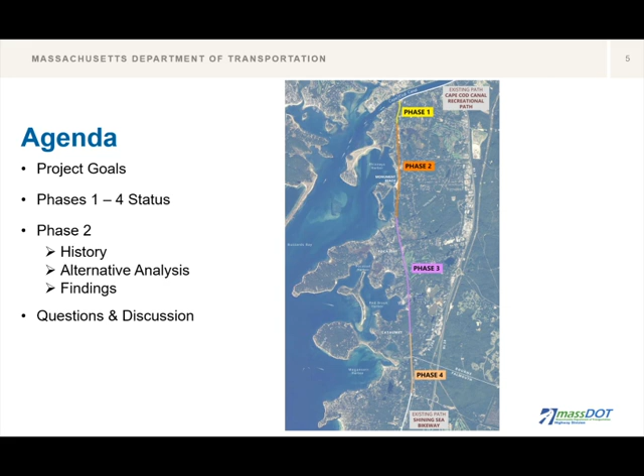First, we're going to talk about our agenda. We're going to discuss the project goals, the status of phases 1 through 4 of the Bourne Rail Trail. Then we'll focus on the phase 2 portion of the project, the history, and the alternatives analysis that we've conducted, and then we'll open it up to questions and answers and discussion to get some feedback on our implementation strategy.

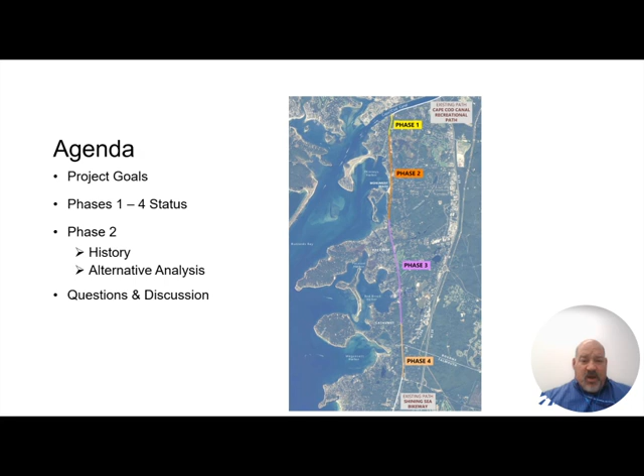Our project goals: a goal of the region, described in Vision 88 by the Cape Cod Commission and in parallel to the statewide bike plan, is to establish and implement a region-wide trail network for all users in a healthy and sustainable manner. We want to connect the canal path to the Shining Sea Bikeway in Falmouth, which were both included in Vision 88 and in the statewide bike plan. As part of that, we're evaluating alternatives that can be implemented.

Let me first state, the town of Bourne has been a great partner on all phases of the Bourne Rail Trail project. The town hired VHB to design phases 1 and 2, and in partnership with the town of Falmouth, phase 4.

As the design is developed, constraints with standards, right-of-way, and permitting have surfaced. While the Highway Division designs and implements many rail trail projects statewide, we follow design standards as they interact or possibly impact stakeholders. There needs to be a compromise at times. I don't want to get into the specifics at this time. I'm going to allow VHB to go through the presentation and provide a summary.

However, DOT recognizes that when constraints become barriers to implementation, we need to find a path forward. We may not build 100% consensus on a project, and I could reference the Cape Cod bridges, which you're all aware of. Everyone knows those bridges need to be replaced, and we're working diligently on the project design and permitting efforts, but there's still a lot of work to be done. It can't simply be 'we need to do this, it needs to get done.' We need to find a compromise on certain items, on the bridge types, on the connection details to the roadways, and the like.

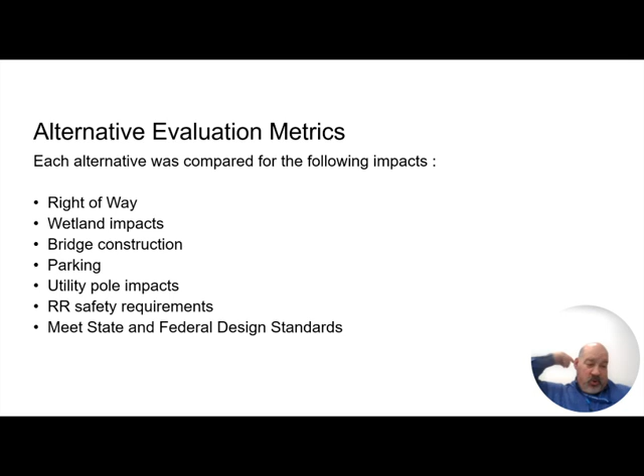One item we haven't really focused on yet tonight is Joint Base Cape Cod, the largest military training location in the Northeast. The Falmouth Secondary rail line runs from the Cape Cod Canal railroad bridge north to North Falmouth. The Otis branch runs east into Joint Base Cape Cod at the Upper Cape Regional Transfer Station. So the Falmouth Secondary and the Otis branch connect Joint Base Cape Cod to the main southeastern Mass rail line.

And they complete an important part of the strategic rail corridor network, called STRACNet, a network of rail lines and connectors linking U.S. military installations and transportation hubs throughout the United States. STRACNet identifies Joint Base Cape Cod as one of 25 Army installations nationwide requiring rail service. It's a vital part of our national defense, making it possible for the U.S. military to move heavy equipment, supplies, and troops across the country in times of national emergency.

Accordingly, in 2018, the Falmouth Secondary and the Otis branch were used to move armored recovery vehicles from Louisiana to Massachusetts. To remain prepared, the military must be able to adapt and quickly respond to threats posed by real-time world events. Looking at the strategic importance of this line, the focus can't be on when did we use it last. It must be on, will it be there when we need it?

To ensure military readiness, a new spur connecting Joint Base Cape Cod to the main line would need to be built before any existing rails could be removed. Because the Falmouth Secondary is a working railroad, abandoning the track would require a petition for approval from the Surface Transportation Board, as well as discussions with the Department of Defense. Any changes to the Otis branch would also have implications for the Upper Cape Transfer Station and existing contracts with operators that are in place.

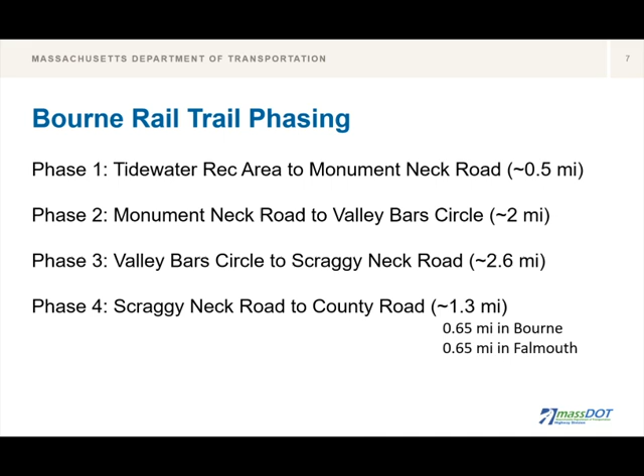The project phasing is as follows. Phase 1 is from the canal at the Tidewater Recreational Area parking lot to Monument Neck Road. Phase 2, which is what we'll be talking about today, is from Monument Neck Road to Valley Bars Circle. Phase 3 is Valley Bars Circle to Scraggy Neck Road, and Phase 4 is Scraggy Neck Road to County Road.

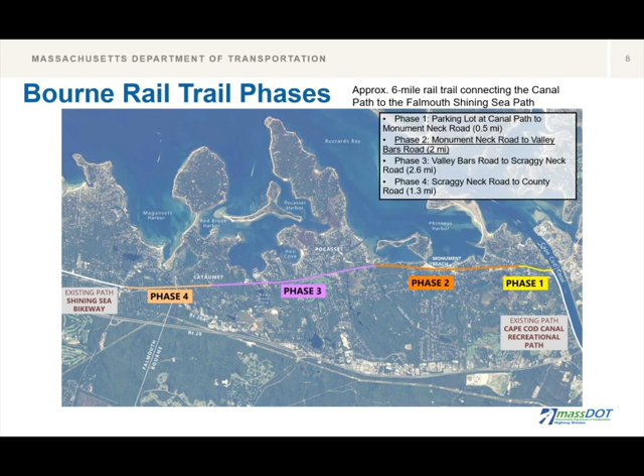This graphic is just a representation of each of the phases. Phase 1 starts at the canal and ends at Monument Neck. Phase 2 starts at Monument Neck and ends at Valley Bars. Phase 3 starts at Valley Bars and ends at Scraggy Neck Road. And Phase 4 ties into the Shining Sea Bikeway at County Road.

Phase 2 is at the alignment selection stage. The design needs to be initiated and the construction advertisement date has not been determined.

Phase 3, a study to determine what the preferred alignment would be, has not been initiated and the construction advertisement date has not been determined.

In Phase 4, a pre-25 concept level design has been designed, but the construction advertisement date has not been determined.

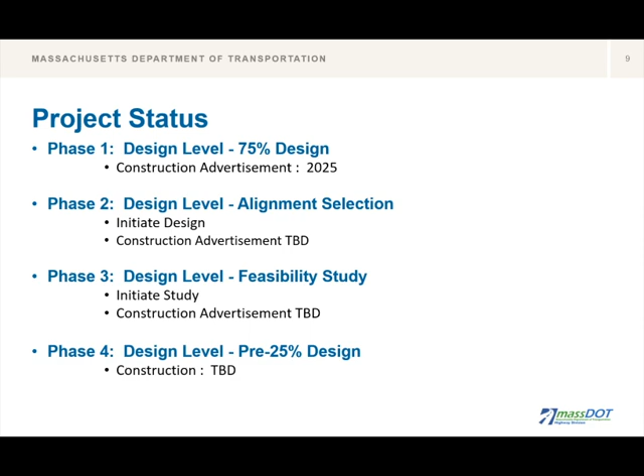The next series of slides are going to go through state and federal design criteria and the project history.

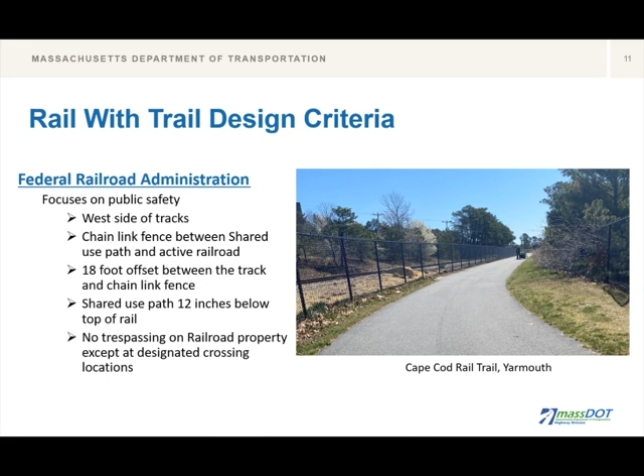The design of rail with trail projects or any shared use path project needs to follow federal criteria. For rails with trails, that criteria falls under the Federal Railroad Administration requirements. Some of the design criteria that we followed for this project are listed on this slide.

For shared use path designs, the design needs to follow FHWA and Mass DOT highway design criteria. Both of those agencies focus on multimodal mobility and healthy transportation designs. They also focus on safety for the path users.

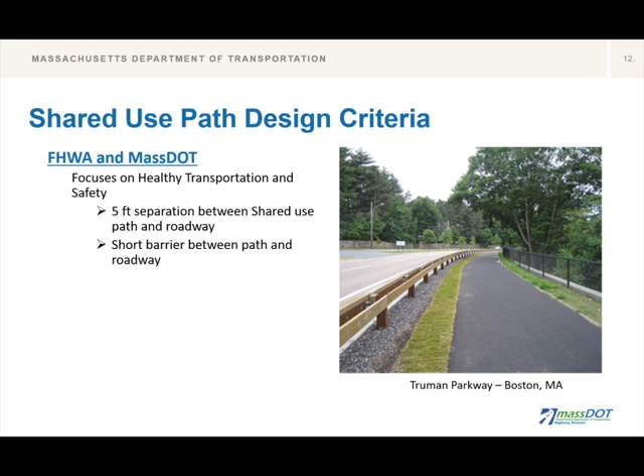To get into a little bit of the Phase 2 history, the town retained VHB to develop concepts for the design of the shared use path for Phase 2. There were two alternatives that were considered for the shared use path within the Phase 2 project limits.

Both alternatives were within the railroad right-of-way on the west side of the tracks. One alternative looked at a 10-foot minimum offset with varying offset at some of the constraints from the center line of track to the shared use path. The second alternative was a standard 18-foot offset from the center line of track to the shared use path.

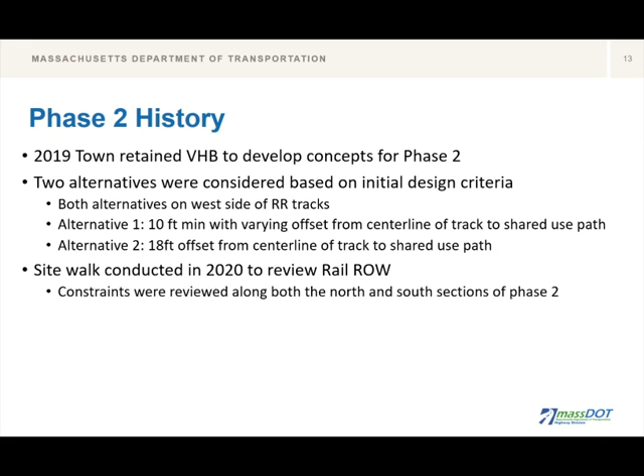To take a look at each of these alternatives, a site walk was conducted in 2020 to review some of the constraints within the railroad right-of-way. The site walk took a look at some of the impacts to private property that were identified as part of the development of the concept plans.

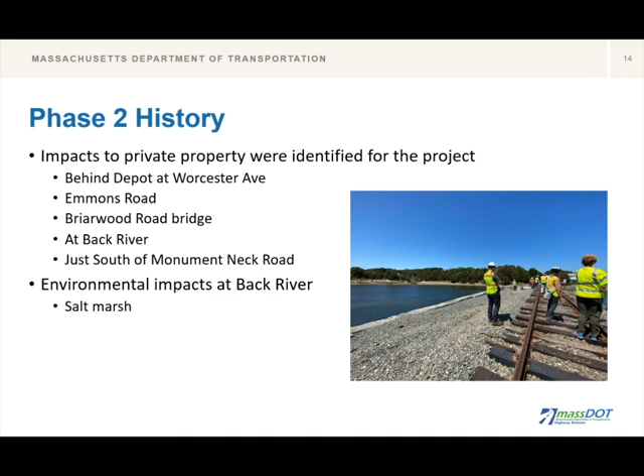Some of the impacts included along the residential properties behind the depot at Worcester Ave, residential properties at Emmons Road, the Briarwood Bridge itself, and at the Back River there would be impacts, and also just south of Monument Neck Road. It was also noted that there are environmental impacts at the Back River if an 18-foot offset was used.

The next series of slides show the concept plans that were developed in 2019 and 2020 as a result of initial conversations with Mass DOT Rail Division and Mass DOT Highway Division. This plan shows that the shared use path has an 18-foot offset from the center line of the railroad track.

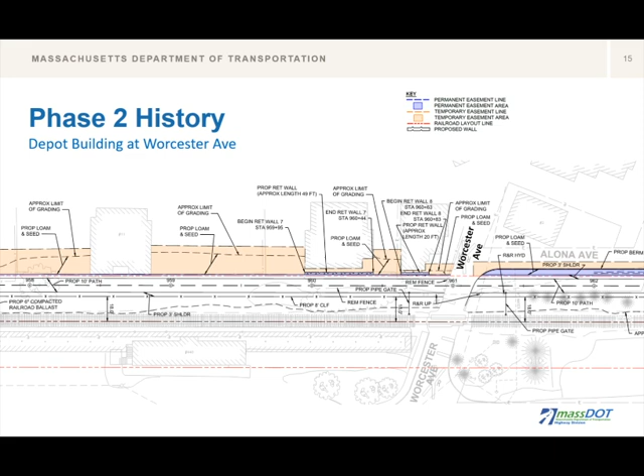At Worcester Ave, there are 3 properties behind the depot that would have impacts associated with where the shared use path is adjacent to the property itself. You can see at this location, this house would be right on the shared use path. These 2 houses adjacent to Worcester Ave would require retaining walls, so the construction of the shared use path wouldn't fall within the houses or fill in the back of the houses.

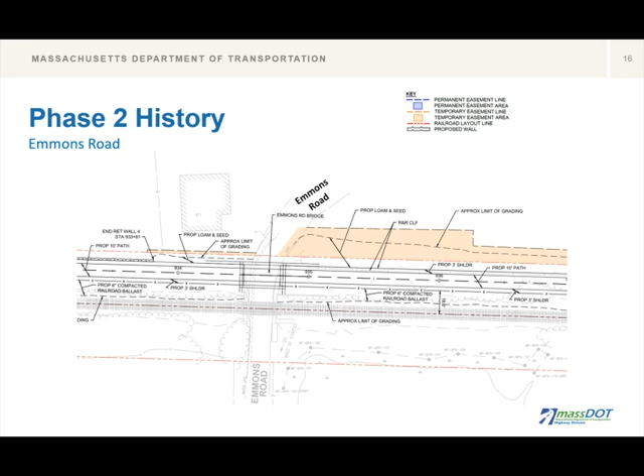At Emmons Road, this property here would be about 23 feet from where the shared use path would be constructed.

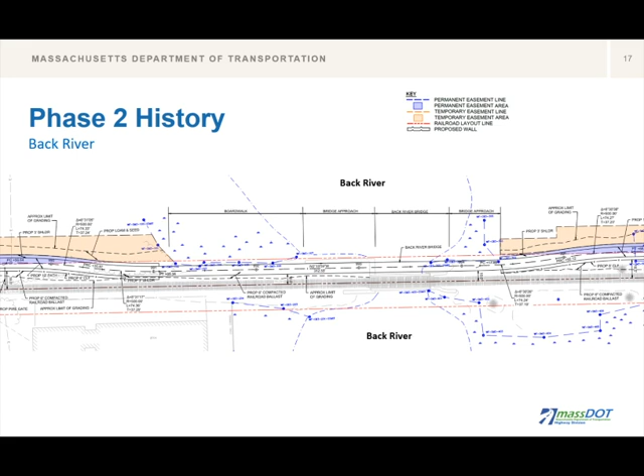At the Back River, to avoid this blue line, which is wetlands, or to minimize the impact to wetlands, some of the things that were discussed in the field was to bring the shared use path onto the existing bridge abutment that's not currently being used by the railroad, and minimize the impacts to the wetlands that are adjacent to the bridge itself. Some of the other impacts could be minimized or avoided by putting sections of the path on a boardwalk structure to span over the wetland areas.

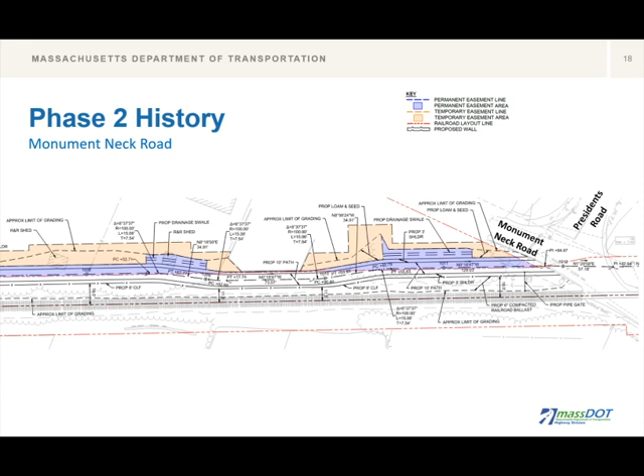This slide shows the path with an 18-foot offset at Monument Neck Road, which is the northern limits of Phase 2. This section of the project had what we think is a raised septic field adjacent to the railroad right of way that we were trying to avoid, which shows the offset between the center line of track and the shared use path go from 18 feet down to an 11.5-foot offset to avoid this septic field and to stay within the existing railroad right of way.

When we took a look at the Phase 2 alternatives, we divided them into a northern section and a southern section to really study what the alternatives could be for each phase of this project. The Phase 2 south section project limits for this alternatives analysis would be from Worcester Ave to Valley Bar Circle, and the northern section would be from Worcester Ave to Monument Neck Road.

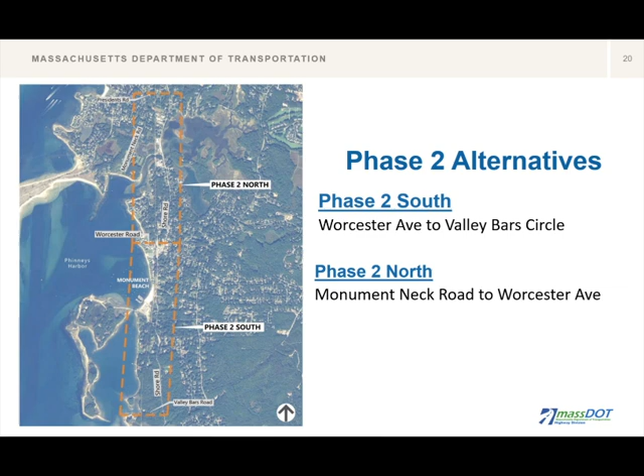For the southern part of Phase 2, from Valley Bars Circle to Worcester Avenue, VHB was asked to evaluate 3 different alternatives. The first is a rail with trail alignment on the west side of the railroad tracks. The second is a shared use path on Shore Road. The third combines the first two, with a rail with trail on the west side of the tracks from Valley Bars to Monument Beach, then crossing to Shore Road with a shared use path from Monument Beach to Worcester Avenue.

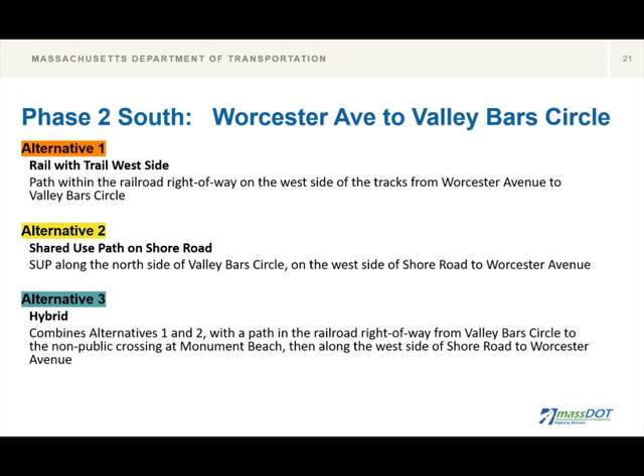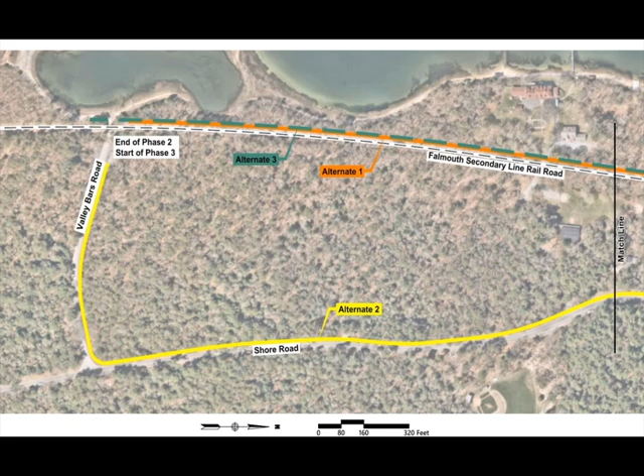The next few slides are zoomed out aerial images showing the alignment for each alternative. As you can see, alternatives 1 and 3 are on the west side of the railroad tracks, and alternative 2 goes east on the north side of Valley Bars Road to Shore Road, where the path continues north on the west side of Shore Road.

This slide continues to show each alternative for the southern part of Phase 2. I'd like to point out that for alternatives 1 and 3, a proposed bridge over Emmons Road would be needed.

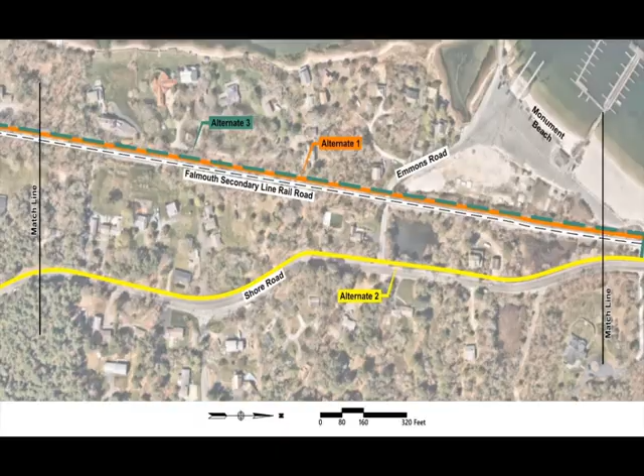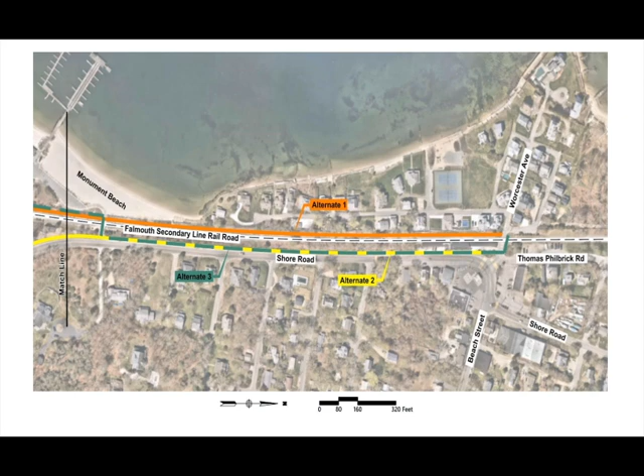This last aerial view shows how alternative 1 continues on the west side of the existing railroad tracks, alternative 2 continues on the west side along Shore Road, and alternative 3 uses the existing crossing for emergency vehicles at Monument Beach to go from a rail with trail to a shared use path. Each of these alternatives ends at Worcester Avenue, where the northern part of Phase 2 was evaluated separately, and we will go over those alternatives later in this presentation.

Now I'd like to discuss some of the existing features found in each alternative on the southern part of the Phase 2 analysis. The image on the left is from our 2020 site visit of the Briarwood Lane Bridge. The path would be proposed to go in the space between the existing pier and the abutment, but this would need to be evaluated further, and any impacts to the existing bridge structure would need to be looked at.

The image on the right shows the existing railroad bridge over Emmons Road. Alternatives 1 and 3 propose a new bridge structure that is an 18-foot offset from this existing bridge. As shown before, during the history of the project, there is a house that would be in close proximity to this proposed structure.

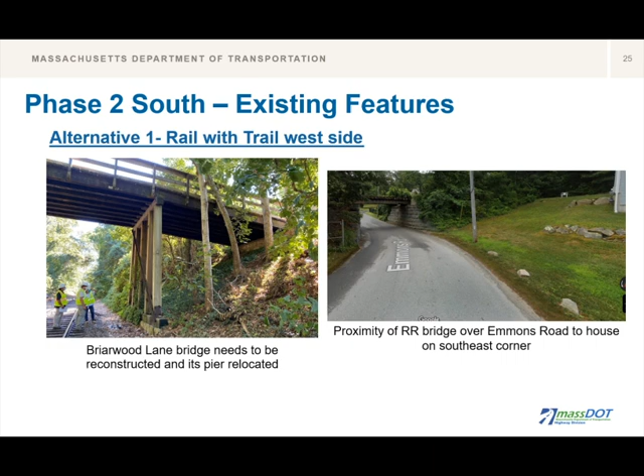Next, these two images are at the depot building on Shore Road, close to the Worcester Avenue intersection. Both taken at the 2020 site visit, with the proposed path on the west side of the railroad tracks, you can see there would be major impacts to the houses in close proximity to the railroad tracks, and the existing screening would have to be cleared away.

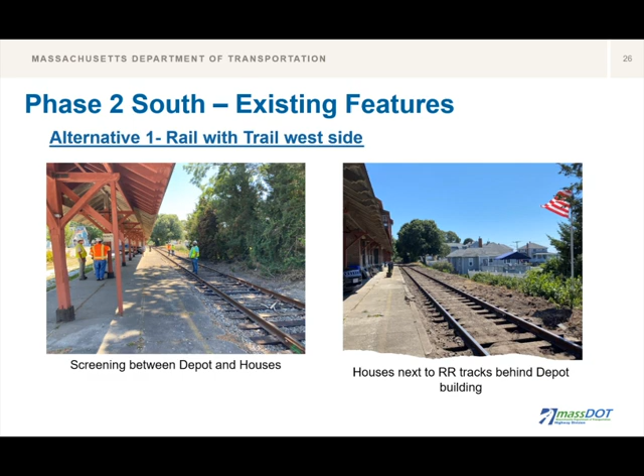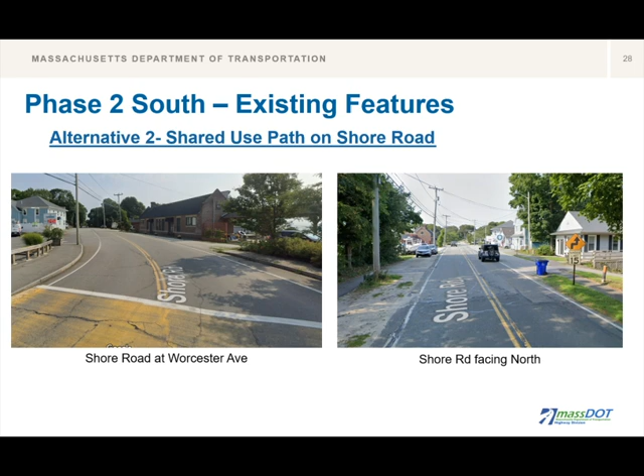The picture on the right is another part of Shore Road, an example of Shore Road having sidewalk on one side of the road, but there are some parts of Shore Road that do not have any sidewalk. Even though there is a sidewalk in this picture, it is not universally accessible. This picture also shows an example of the informal parking found in some areas on Shore Road.

To avoid major impacts at this location, one recommendation is to realign Shore Road here. Shore Road is not in the middle of the existing layout, so there could be space within the public right-of-way to shift the roadway and put in a shared use path.

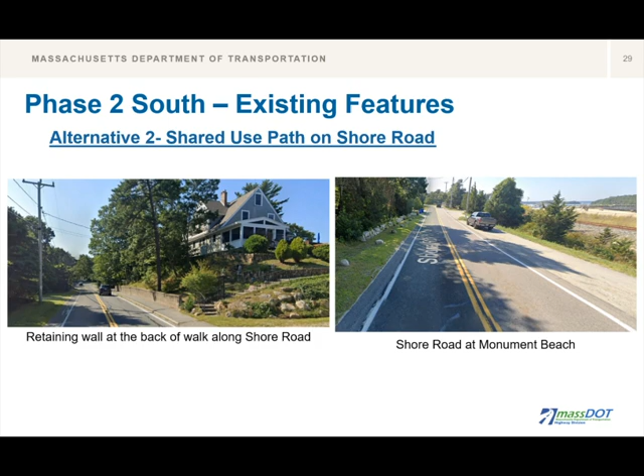The picture on the right is showing Shore Road at Monument Beach. In the image, you can see the railroad tracks and the beach in the back. People park along Shore Road and trespass on the railroad tracks to get over to the beach.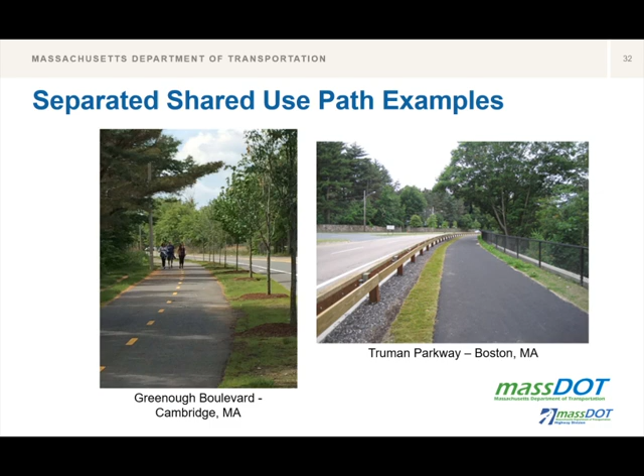For alternative 3, I just want to show the existing emergency vehicle access between Shore Road and Monument Beach. This is what we are proposing to use to transition alternative 3 from a rail with trail to a shared use path.

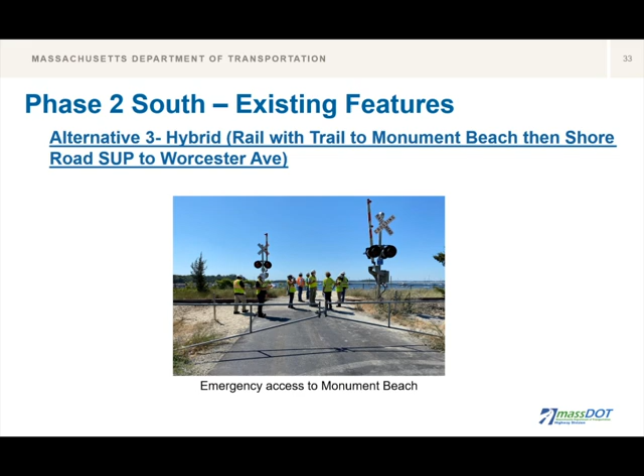Now, for the northern part of Phase 2, which is from Worcester Avenue to Monument Neck Road, VHB was asked to evaluate 3 additional alternatives.

Alternative 4 is a rail with trail alignment on the west side of the railroad tracks. Alternative 5 is a shared use path on Shore Road. And alternative 6 is a rail with trail alignment on the east side of the railroad tracks.

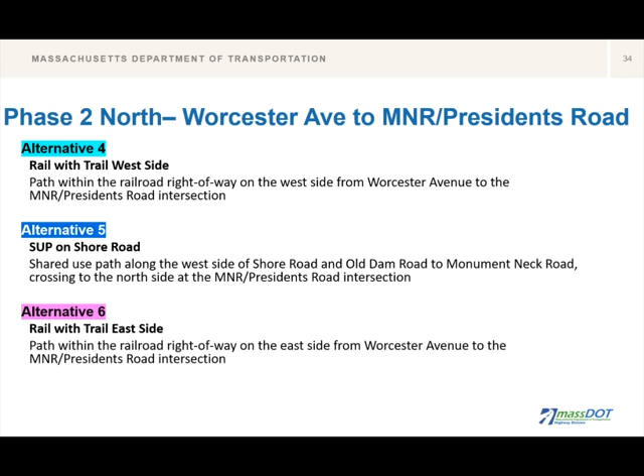The next few slides are zoomed out aerial images that show the alignment for each alternative. As you can see here, alternatives 4 and 6 are on the west and east side of the railroad tracks, and alternative 5 goes north on the west side of Shore Road.

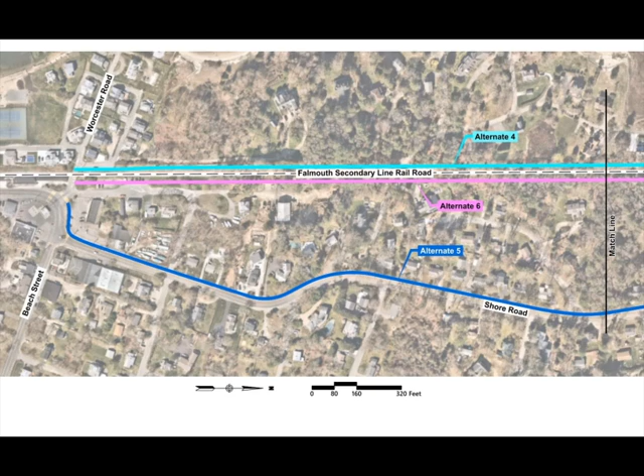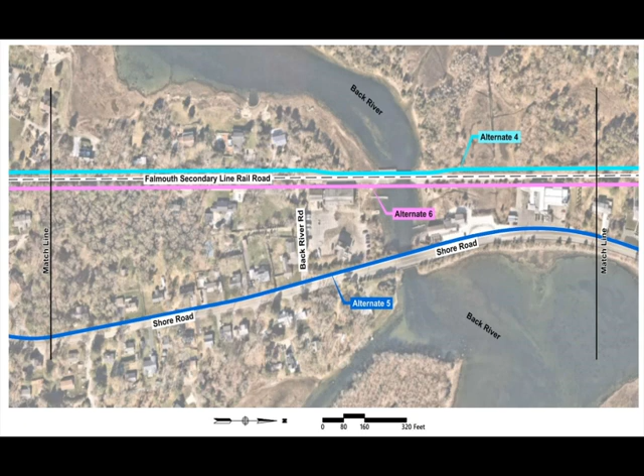This slide continues to show each alternative for the northern part of Phase 2. On this slide, I would like to point out for alternatives 4 and 6, proposed bridge structures over the Back River Bridge would be needed. For alternative 5, the shared use path is proposed to fit on the existing bridge structure for Shore Road.

This last aerial view of each alternative shows how alternatives 4 and 6 each continue on the west and east side of the existing railroad tracks. Alternative 5 continues on the west side of Shore Road to Old Dam Road and then crossing Monument Neck Road. Each of these alternatives end at the Monument Neck Road and President's Road intersection where they connect to Phase 1 of the project.

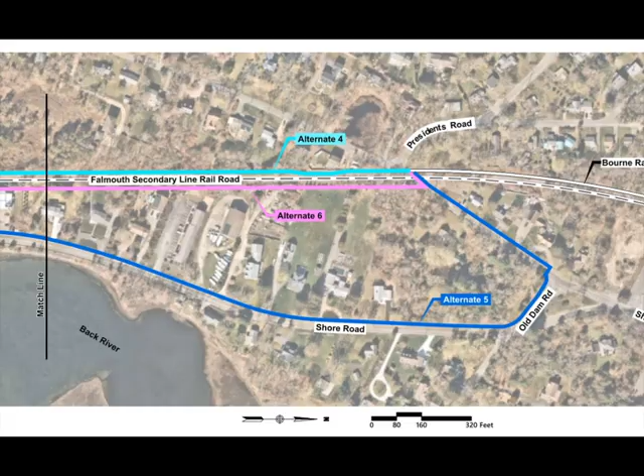Now I'd like to take some time to discuss some of the existing features for each of the alternatives on the northern part of the Phase 2 analysis.

These two images are from our site walk back in 2020. The image on the left shows the concrete foundation that is on the layout line on the west side of the tracks. The image on the right is at the Back River. There is an existing bridge structure that goes over the Back River for the tracks. As you can see in the picture, there's salt marsh around the river.

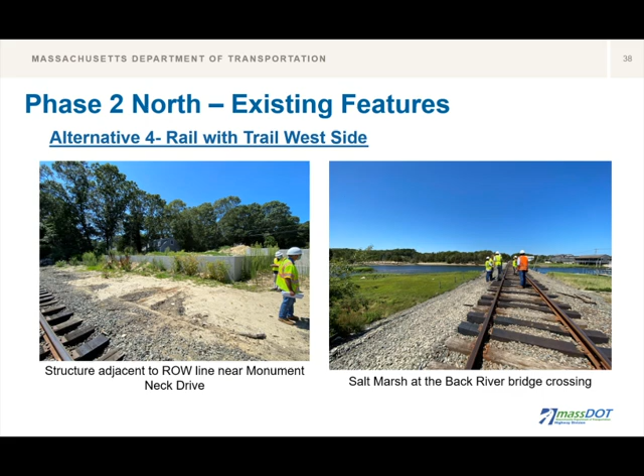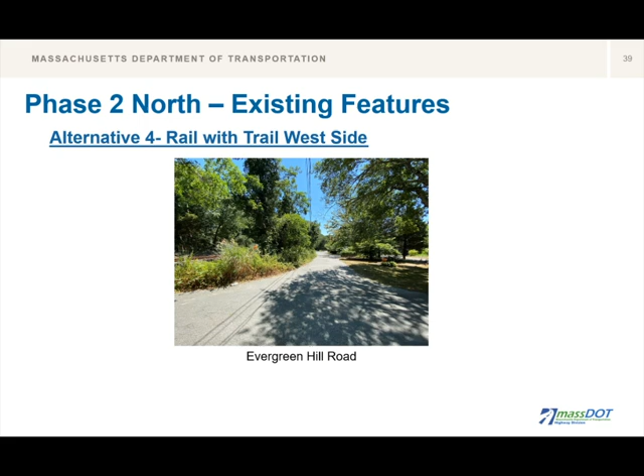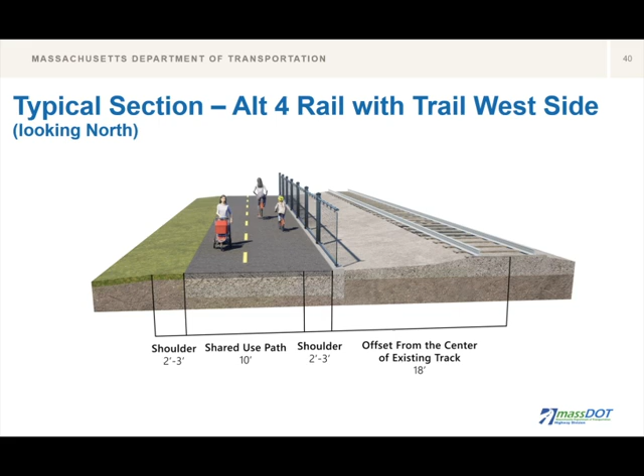Here, similar to alternative 1, here's an example of what a typical section for this alternative would look like. This section is looking north, and you can see the offset from the existing rail line to the path with a chain link fence separating the path from the tracks. This is the same typical section being used in Phase 1 of the project.

For alternative 5, for this section of the path that would be on Monument Neck Road, you can see from the image on the left that there are parts of Monument Neck Road that aren't in great condition, which would get repaired with the installation of a shared use path. Also, on this image, you can see there is a sidewalk on one side of the road, but similar to the sidewalk condition on Shore Road, it is not universally accessible.

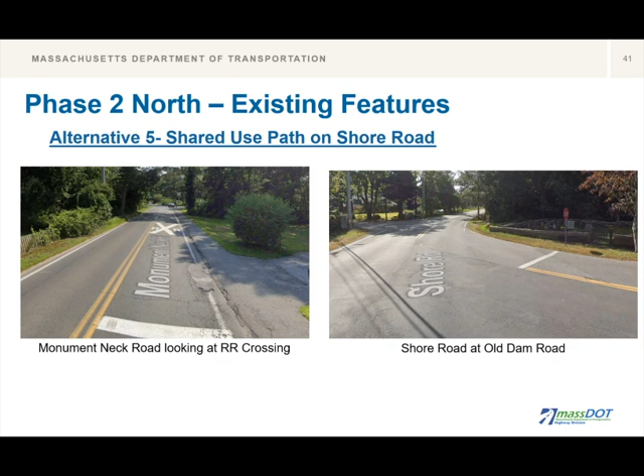The image on the right of this slide shows the intersection of Shore Road and Old Dam Road. This is a very wide intersection, and on the corner is the Monument Neck Cemetery, which is a cultural and historic site. There is a pinch point at the corner of the existing stone wall, which results in the path through this area needing to be evaluated further so we don't impact the cemetery.

These two images for alternative 5 show some additional sections of Shore Road. The image on the left is of Shore Road over the Back River, where the shared use path is proposed to fit on the existing structure. This bridge was built in 1931, and further structural analysis would be needed to determine the suitability of putting a shared use path on the bridge.

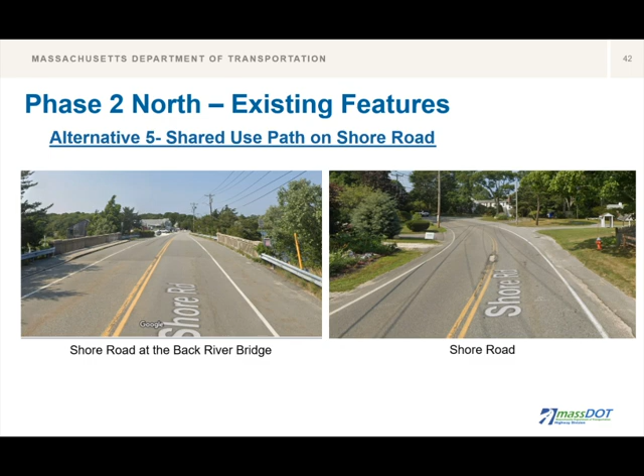The image on the right shows how there are more driveways that connect to Shore Road in the northern section of Phase 2. During our analysis, we saw that there are more houses and residents in the northern section of Phase 2 compared to the southern section. Also, this is another section of Shore Road that has an existing sidewalk, but like what we have seen previously, it is not universally accessible.

This typical section is the same as shown before for the southern part of the analysis. The section is looking north, and you can see the 5-foot buffer between the existing roadway and the shared use path. In this example, we are showing a small barrier in the buffer.

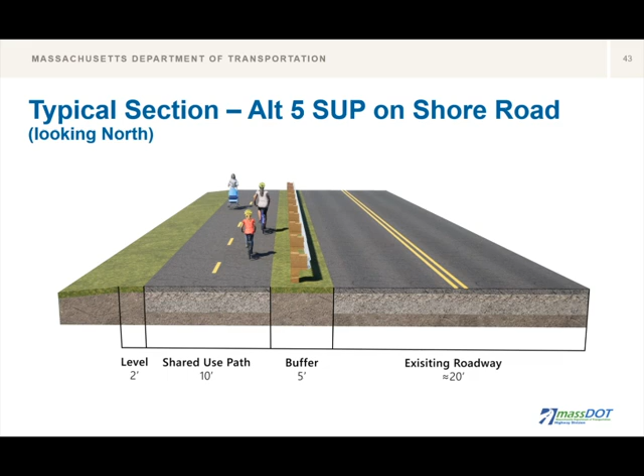Here are some of the existing features for alternative 6, which is the rail with trail on the east side of the tracks. The picture on the left is an example of how also on this side there are existing buildings within close proximity to the tracks, and the picture on the right shows how there are no encroachments at Monument Neck Road on the east side.

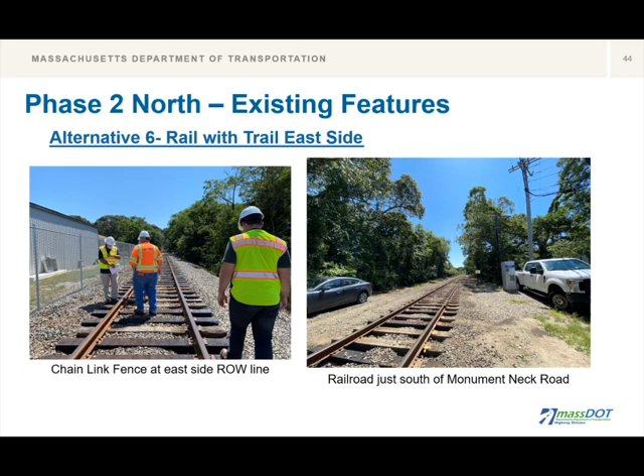This is an example of the typical section for the path being on the east side of the tracks. Similar to the west side, there is a separation between the tracks and the edge of the path, and the fence along the shoulder that is on the rail side.

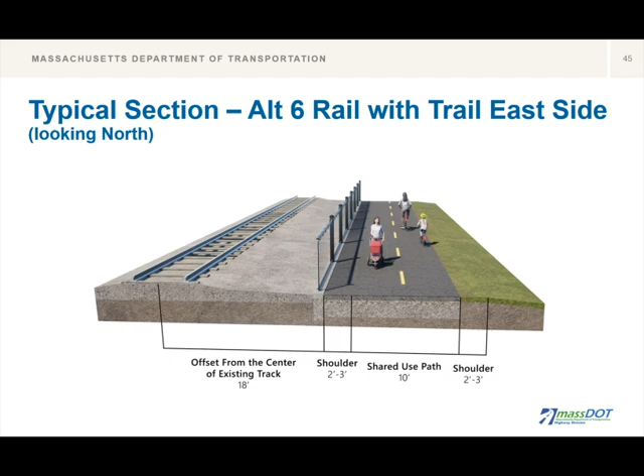Now I'd like to turn it back over to MassDOT.

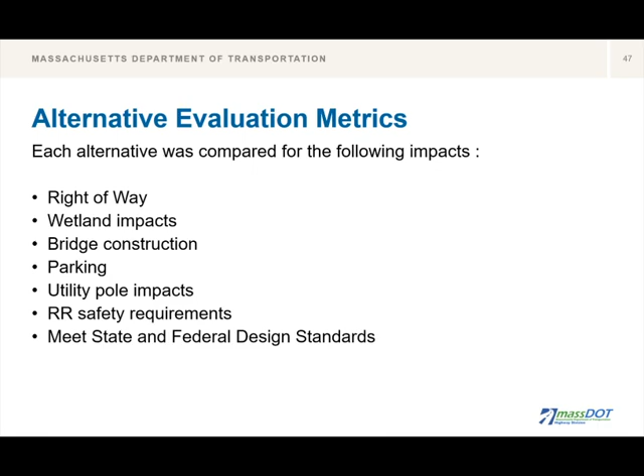So evaluating our alternatives, we developed and identified some metrics, which are listed here. We've compared each of the alternatives to these metrics: the right-of-way, wetland impacts, bridge construction, parking and trailheads, utilities and utility pole impacts, railroad safety requirements, and then we need to meet state and federal design standards.

One item that we haven't really focused on yet tonight, I want to discuss, and that's Joint Base Cape Cod. Joint Base Cape Cod is the largest military training location in the Northeast. The Falmouth Secondary, the rail line, runs from Cape Cod Canal, the railroad bridge, to the north to North Falmouth.

The Otis branch runs east into Joint Base Cape Cod at the Upper Cape Regional Transfer Station. So the Falmouth Secondary and the Otis branch connect Joint Base Cape Cod to the main southeastern mass rail line and complete an important part of the strategic rail corridor network, called STRACNet, which is a network of rail lines and rail connectors that link U.S. military installations and transportation hubs throughout the United States.

STRACNet identifies Joint Base Cape Cod as one of 25 Army installations nationwide requiring rail service. STRACNet is a vital part of our national defense, making it possible for the U.S. military to move heavy equipment, supplies, and troops across the country in times of national emergency.

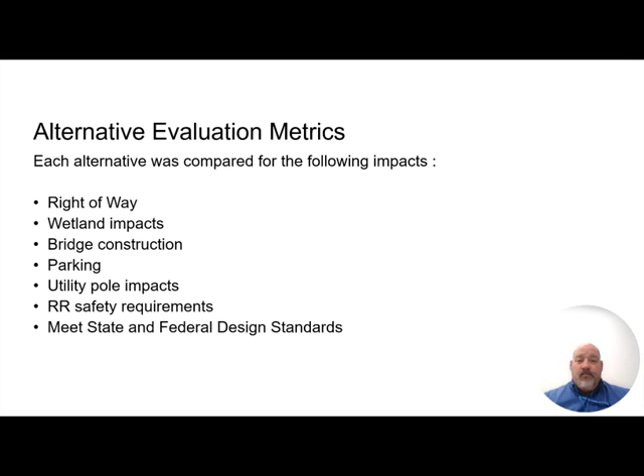Thank you, John. As we close out our presentation with these last two slides, I appreciate the context that John, Trish, and Marissa provided. MassDOT's recommendations boil down to the characteristics of being constructible and implementable. MassDOT's recommendation for the southern portion of the Phase 2 trail is Alternative 2, also known as the Shared Use Path on Shore Road. This alternative is recommended because it provides an opportunity for safe accommodations for pedestrians and bicyclists. In addition, Shore Road is a state highway layout, which would be under MassDOT highway jurisdiction. While there may be potential right-of-way impacts associated with this alternative, there is potential to shift the alignment of Shore Road.

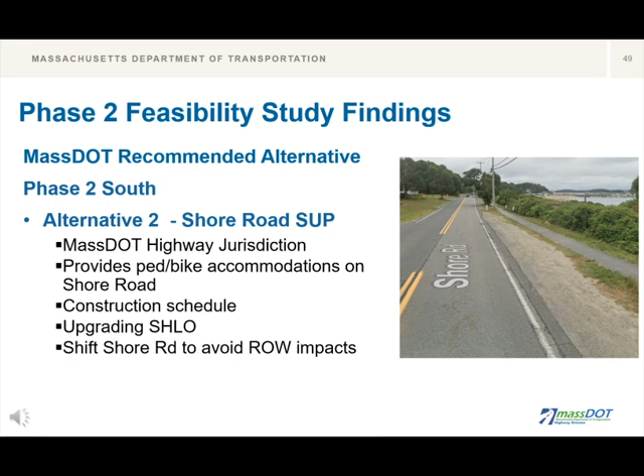For the northern portion of the Phase 2 trail, MassDOT's recommended alternative is Alternative 4 or 6. Both are rail with trail alternatives. Alternative 4 is the rail with trail on the west side of the railroad. Alternative 6 is rail with trail on the east side of the railroad. Both alternatives will require significant collaboration between the Highway Division and the Rail Division.

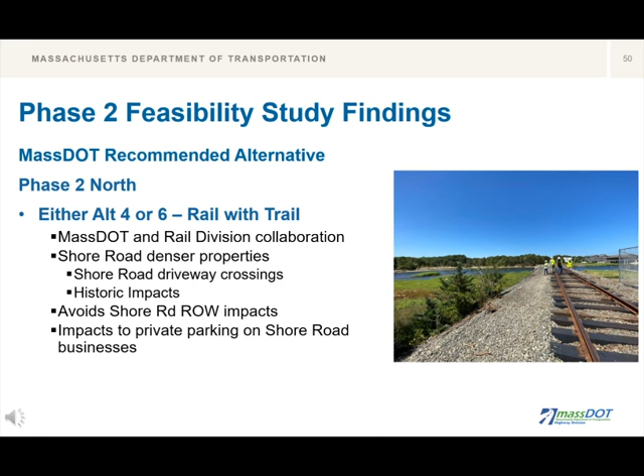At this northern portion of the Bourne Phase 2, we are recommending the rail with trail to avoid significant right-of-way impacts to Shore Road properties. The neighborhoods in this area are denser with a good amount of driveway crossings, which would increase potential conflict points between vehicular traffic and bikes and peds. While there may be impacts to private parking on Shore Road businesses with these alternatives, we still find the rail with trail alternatives to be less of an impact compared to a shared use path on Shore Road, especially given the context of historic impacts.

Now that you've heard us speak, we'd like to hear from you too. At the live public information meeting held on November 14th, the audience had an opportunity to provide feedback to the presentation participants. If you missed your opportunity then, we encourage you to voice your input at this time. We encourage folks to provide any comments and questions they have on this presentation and this project.